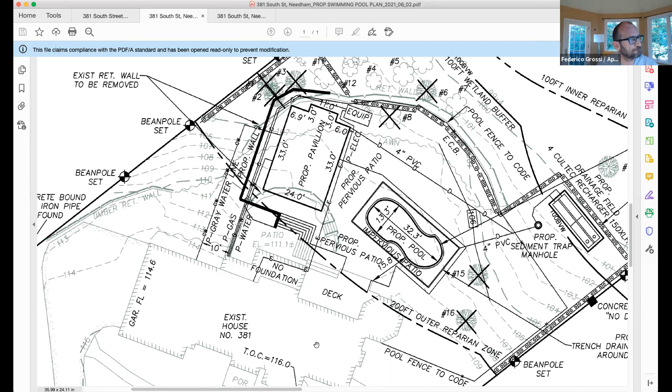So I can walk through. The wetland report was updated and submitted. Can you see my screen? Yes. Here's what the pavilion will be.

I was asked to add the utilities, so we added water, the gas line here, electric, and gray water, properly separated by 10 feet from the water line. I did talk to the inspector and a plumber. One question was whether the water line had to be 48 inches deep, and since the pool and the patio can be winterized, they said that's not necessary as long as we provide the right valves for winterization, and we can clear the line and blow air in the winter to winterize both the gray water line and the water line. So that's what we'll do with the inspector.

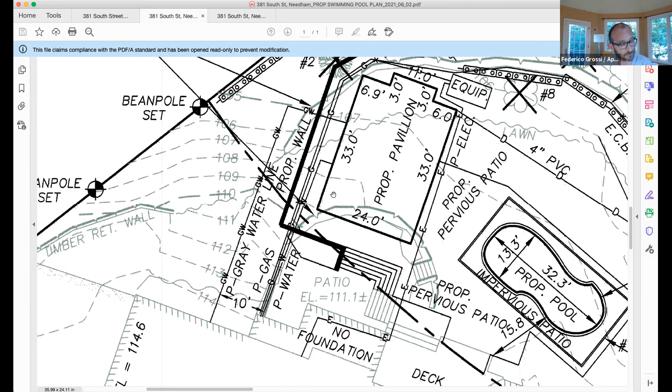So I did the test pit. We dug right here where the chambers will be, 48 inches deep—that's the depth of where the chambers will go. Found no water, and the absorption is about 5 inches per hour in that location.

So how did you dig this 4-foot deep hole? With a shovel? By hand? You dug a 4-foot deep hole by hand in your backyard by yourself? Yes. Wow, was it hard? No, not in that location. Did you hit any rocks? Not there, but I did hit some fill in the patio because it seems that on top of the retaining wall it was filled.

So in that spot I dug there will be 1 foot of gravel. I dug all the way to 1 foot and found gravel with fines in there. That one actually took a little longer for the water to percolate where the pervious patio will be. But here the percolation rate was really great, and the soil was very sandy. I have my Excel file with all the data.

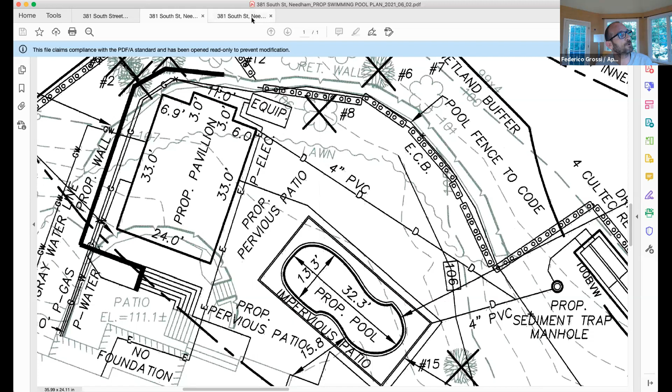So that was done. For the planting, what I was proposing before was to plant 12 Atlantic white cedars. The ask was to reduce to 6. I still made it 8 now—I'm happy to do 6, but I felt that in these 2 small locations, if we plant 2 to make sure at least one survives, it will be appropriate. So I marked the locations as I proposed.

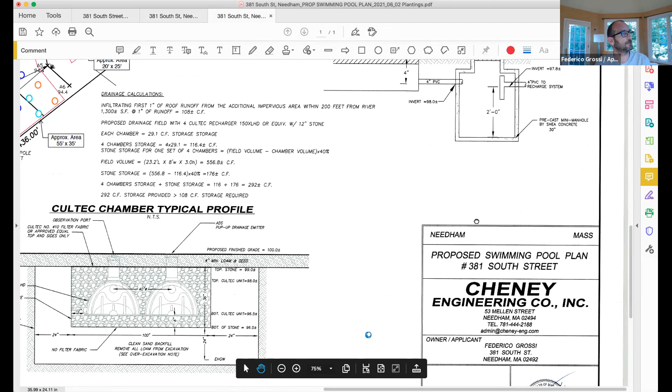There are major areas that are clean for planting, with no big trees around. We have a 10 by 20 area right across from flag B3, a 10 by 15 across from flag B7, and about a 20 by 25 area on the side of the house by the Alderbrook. I feel we can fit 4 here, 2 and 2 in these 2 areas of Atlantic white cedar. I'm happy to just do 1 and 1 here.

Did you find out about planting within the drain easement? No, I didn't look into that. Yeah, I don't think you can put those plants in the drain easement because they're going to be big trees, right? That's the idea, they're going to be really big trees. Yeah, but there's already a ton of big trees—these basically are the little spaces without big trees in the easement. Well, I understand that, but I don't think it would be appropriate for the Conservation Commission to give you permission to plant in the town's drainage easement when they may come and dig that whole thing up someday.

So we're not going to be able to let you plant those 4 trees in that location. Okay, I think then we should just move on, because actually the easement, I think, is on that spot.

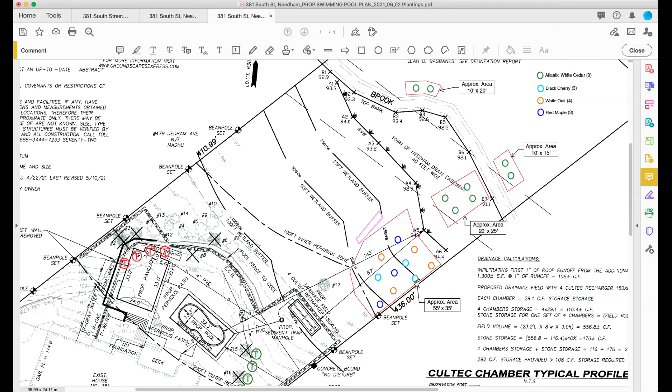Somebody needs to mute. Okay.

Okay, keep going. Yeah, and then the 4 transplants that we had here, where the pavilion will be located, where we remove 15 and 16 here that were on the list to be removed.

Were those like the dogwoods or something? Yes, so we have a double-file viburnum, an azalea, a Korean dogwood, and a rhododendron. So you're going to move all of those? And then you're going to, 1, 2, 3, 4, 5, totally, 6, 7. Oh, but they're all 200 feet.

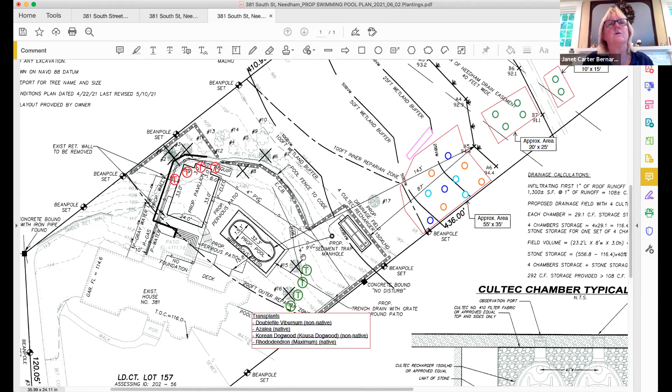So 7 trees are coming out, 4 are being transplanted. Yes, so 7 are coming out, 4 being transplanted, and - I thought 4 of them are being cut as snags? Yes. So they're not completely coming out, exactly - 1, 2, 3, and 6. We can leave the snags like those here. Oh, okay, so then 3 are fully coming out. Yes. Okay.

Okay, so your tree-to-plant ratio is appropriate, and maybe other commission members can weigh in. I know Allison was very interested in the white cedars, which need to be planted in the wetlands - something she thought was very beneficial. But there are also proposed plantings that are not white cedars within the 25-foot no-disturb zone, so other commission members may weigh in on that.

Right, okay, what else? So let's do the math again. Right now I was proposing, because I wanted more white cedars, 18 trees. So if we remove these 4, I still have 14 trees, which is the 2-to-1 ratio. So even removing these 4, we'll still be within the 2-to-1 ratio. Yes, so I wouldn't have to add any additional trees. You do not have to add in that - you have ample trees, I believe. Others can weigh in on that as well.

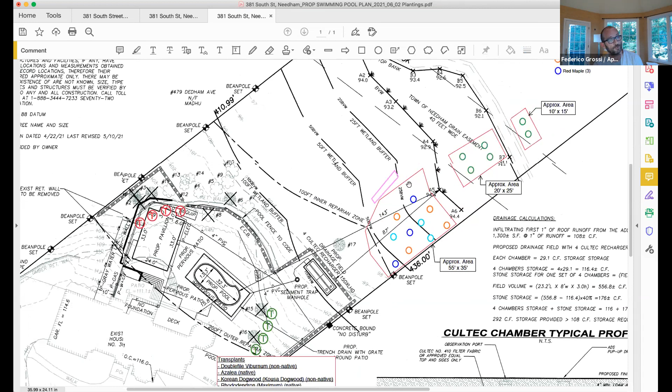Anything else? Yes, so I am requesting a waiver of the regulations for planting in the buffer zone, within the 25-foot buffer zone, and of course in the wetland itself for these 4. And then requesting a waiver of the fee since it's minimal work to be done - it does not require a lot of review by the commission.

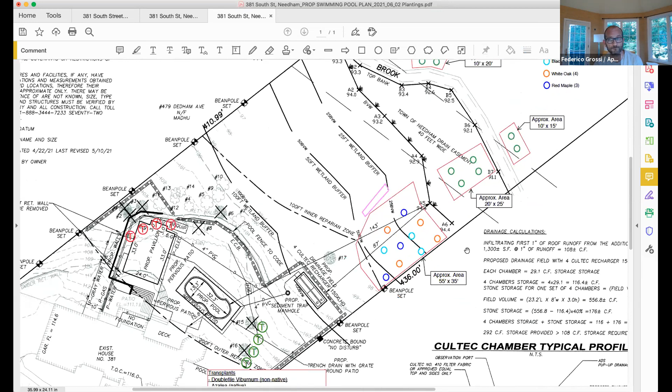Are you done with your presentation? No, so for the alternative analysis, we looked at the project and basically the only alternative location would be in the front yard, which is not common for such a structure. In the backyard, we did our best to reduce the impervious surface as much as possible, so there are no other alternatives on the property to build the project. Is that all written up in the information you gave us? Yes.

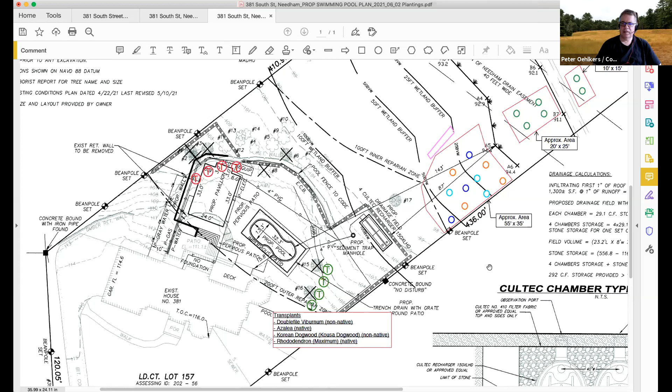Artie, do you have any comments? Not right now, I'll pass on to someone else. Steven, any comments? No comment. Sue, do you have any? I have, I'll put video on later, sorry. No comment. Peter is there somewhere, I think. I don't see him, but I think he's there. I'll speak up. Yep, I see you now. Do you have anything to add? No, nothing to add. Is that everybody? I think that's all of the commission members.

My one other question, and then I'm going to ask Deb and Clay if they have anything to add: have you spoken to the building department about your stormwater improvements and what the town regulation says? Have you talked to anybody about that? No. The town has a bylaw that says if you're increasing the impervious area of your existing house building by 25 to 50%, you also need to infiltrate.

along like half of your roof, like the side of the house where the increased impervious is going. Yes, but the impervious we're increasing is less than 25%. Oh, is it that the pavilion and proposed pool with the patio around it is less than 25% of your existing house? Yes, of the existing impervious.

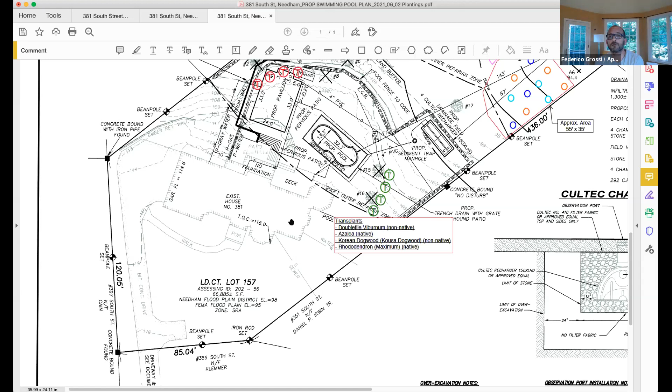That's what the engineer told me, and that's why. Okay, that's what my question was, I couldn't tell how much impervious you were increasing by. So, when you say the engineer, was that your engineer, Cheney Engineering? Yes. Cheney Engineering, who plotted that, Artie? Yes. Is it Artie you're working with? Okay. It'd be nice to see that written down.

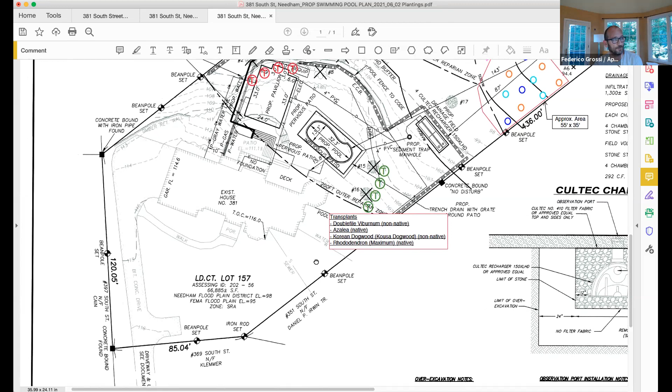Regardless of the regulation, I don't know if I should share this, but there is a bit of slope on this side of the house. So I'm planning, outside of the riverfront area, to put chambers in front to get some of the water off the roof, because I don't want that runoff. That's nothing to do with the commission, but that's something I'm planning for the future. No, but that's all good information we like to hear. That's a good thing.

Okay, I'm really just confirming that for your building permit, because they will stop you. So I want to make sure that's in writing for your percentage of building, so that it's been looked at and accepted.

Janet, can I add to that? Diane from Field Resources. Yes, you may. I think pools are exempt in that bylaw. Oh, all right, that helps. Thank you.

Couldn't remember that part. All right, so is there anybody else in the audience that has any comments for this project at 381 South Street? Clay, do you see anybody with hands raised? No raised hands? Nope. Clay or Deb, do you have anything to add or question on this?

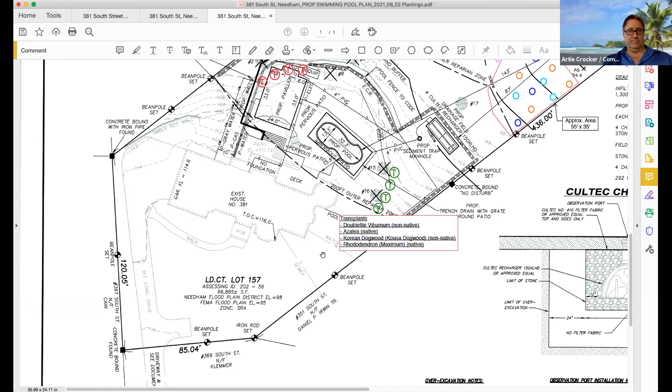I do, just about him doing his own test pits. I think that would be a precedent, I don't know if you want to go that way. Yeah, well, I was thinking about that, because we've had other people do that and then required them to have it officially done. I think in this case we could require the test pit be officially done at the time of construction, now that he has dug down and confirmed he didn't hit water. And if he did it in the last two weeks, it's been pretty wet. Okay, well, so condition a test pit to be done.

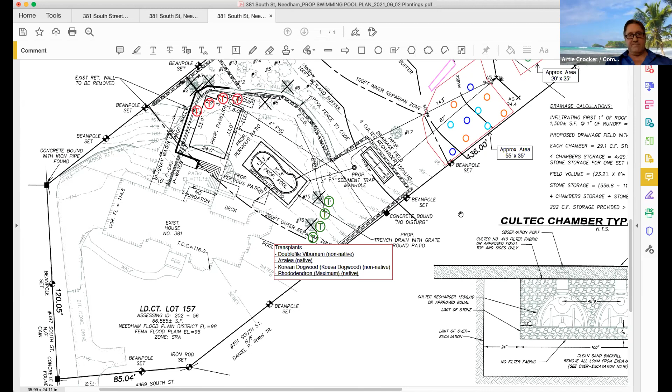At the time of construction. Yeah, I did it right after the three-day, four inches of rain that we got. Because I feel there's something to be said for it, since groundwater would be a concern, and if he dug a hole and didn't hit groundwater, that's significant. Do you have any pictures of that hole? I don't think I took any pictures.

You do an official soil test at the time of construction, and it will need to be done by a certified soil professional or engineer. They're kind of the same. Okay.

So that was my concern, was the amount of impervious cover. I did do the calculation and confirm that the size of the Cultec chamber is adequate for what they're proposing.

I know that Allison was very in favor of the white cedars, which I would struggle with. Does any commission member have any comments about allowing plantings within the 25-foot no-disturb zone, considering we're allowing him to plant basically in the wetland with these white cedars that Allison says are wonderful?

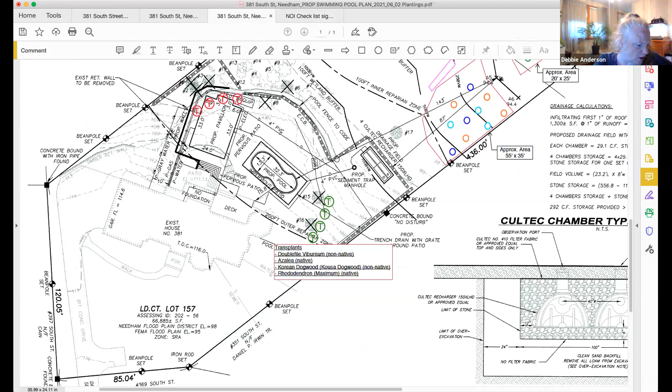Did we confirm that that's wetland on the other side of the stream where he's planting them? Sorry Deb, what was the question? The delineation shows the wetland on the inside of the brook. On the other side, where you're going to put the two areas of white cedars, is that confirmed to be wetland?

Not by the wetland expert. There's definitely wetland in there. You have the same vegetation, but that is not in the report because all she did was measure towards the house.

I don't know if we should run it again. This is definitely all, and actually all the way to very close to the street is marked as wetland in the town maps.

I just wanted to make sure they were going to survive there. Yes, so make sure that when you look at the vegetation on that side, it's as wet as on this side. So all this area is wetland, and I can try to pull it up. It's okay, I was just concerned for your trees, wanting them to do well, that's all. I think if you trust my opinion, they will be the same.

Actually, in the original map that Clay shared with me, that's the whole area shown as wetland. And now the wetland has come to this side as well. It's not shown in older maps on this side of the brook. It was all on the other side of the brook. Okay.

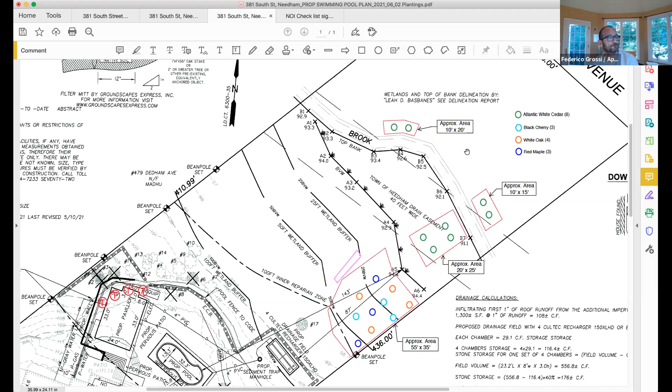All right, so does anybody in the commission have anything else to add? Artie? No, I agree with what was stated about the homeowner doing their own test pit, but what we can do to verify that as it's going on with what was said. So that's good.

Stephen? All set. Peter? Nothing to add. Sue? Sounds good. Do we have everything that we need? And are we ready to close this hearing?

The only thing I'm looking for is hard copies of the revised information. How many hard copies do you need? I need two. I'll pick them up on my way here, David. You'll have them in the morning. Okay, thanks.

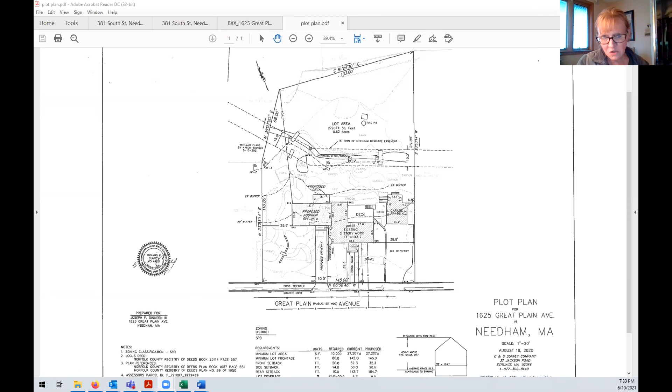The applicant put a small addition on the house, an in-law apartment, and a deck on the side of the existing dwelling with a driveway. The driveway is outside the 100-foot buffer. There's a stream that runs through a drainage ditch at the back of the property.

The property is very vegetated. Cindy has done a lot of work to create habitat for the creatures in the area. The proposed work is outside the 25-foot buffer. The deck kind of skirts the 25-foot line, but the footings will be dug 2 feet in, and the deck will cantilever 2 feet out towards the wetland.

That's going to be placed just at the line, so the footings will be outside. The ditch runs through the entire backyard.

The proposed addition is 753.13 square feet, with the deck off the rear at 120 square feet. As I said, the driveway will be outside the buffer zone.

The vegetation in the area of the addition is rhododendron, hydrangea, mostly pachysandra, and some ivy growing on the house. No trees are to be removed. The rhododendron and hydrangea will actually be relocated on the property.

For runoff, the applicant is proposing to put in rain barrels. Currently there are rain barrels on each corner of the house, used to water the vegetation in the yard.

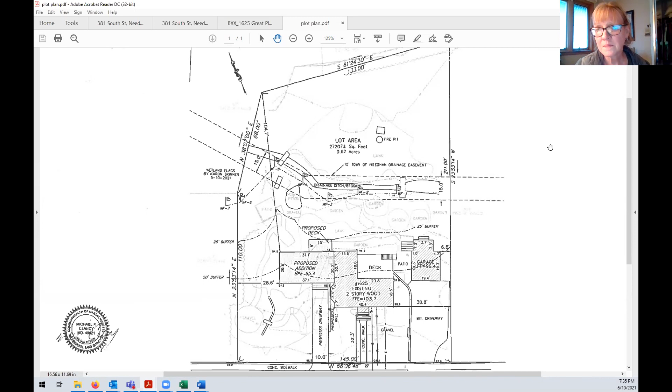When you say what happens in the winter, do you mean with the rain barrels, like do they freeze? What I do is I flip them upside down. Then on the downspouts I put in little diverters, if you will, so the water goes through the downspout and diverts out into the yard. I just add more gutter so it diverts out into the grass.

So you guys will have to let me know. I don't have any rain barrels currently in the back, but I can add them if you think it's a benefit for the project, or not add them if you don't. I like using them because I think they're good conservation of water, and I have lots of gardens.

Yeah, I've actually been on this property because you were part of the garden tour. Is that true? Yeah, a couple of times. And I know you have rain barrels next to your garage, because I actually took a photo of that one year.

I guess I personally am struggling a little bit, because I know you've done a lot of environmentally conscious work on this property, but we may need to require you to infiltrate some of that roof runoff — it is a town requirement now.

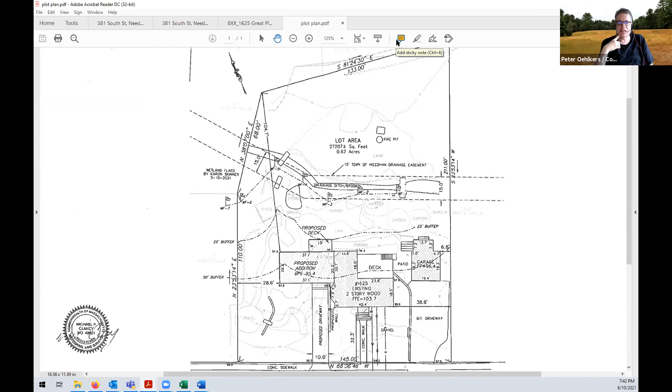The spirit is to keep it as native as possible and keep a close eye on invasives—that's the key, not letting stuff get in there. Well, the runoff from everybody's lawns behind us, it's a joke, but whatever. I don't use any chemicals, but everybody else does, then I have it floating through the yard.

Every time one of your neighbors comes to us, we try to tell them not to use chemicals on their yard. Oh my God, it's frustrating. It really is, but whatever it is. Thank you, no other questions. Thank you, Peter. Artie, do you have any comments?

No, I think it's going on well. It's clear that Miss Macgowan, Cindy, you take this very seriously—the health of the environment and everything going on, doing whatever's possible. So thank you.

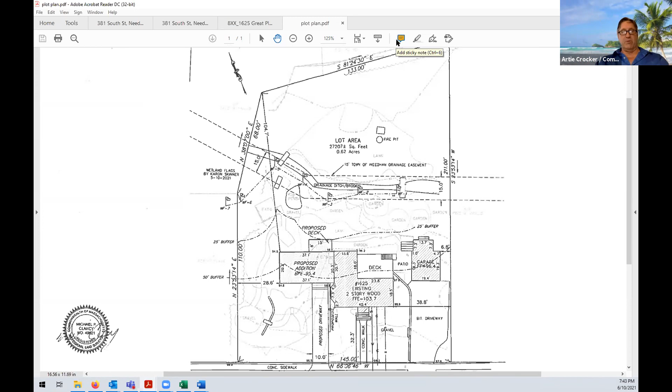Ryan, Sue? We're okay with the deck, even though 2 feet will go over the 25 foot, but the footing is before that line. The deck itself, the top of the deck will be 23 feet away, and the footings will be 25 feet away. Exactly, yes, that's exactly right.

Okay, no comment, sounds nice. Steven, you have anything to add? No comment. Do we have any photos of this property?

Yeah, sure. Do you want to go on Facebook? There's some pictures there. Deb or Clay, have you been out there? Did you guys take any photos? Yeah, I didn't download them though, because you guys never look at them. But I'll have them for the next gardens meeting. It's beautiful right now, you should come take pictures, or you could go on my Facebook page, there's tons of pictures.

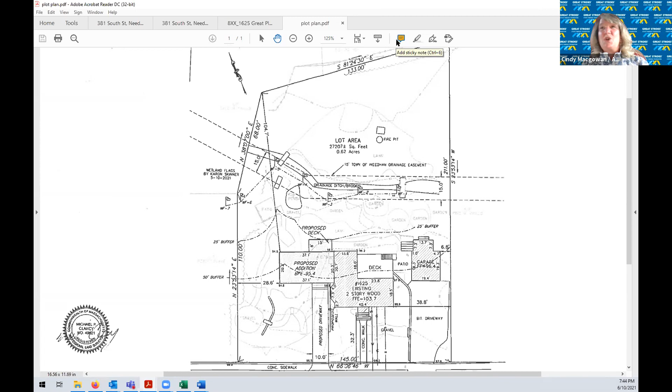Yeah, I think we want some photos of this area to show that this is basically native plantings and not lawn on this side, within the 25-foot no disturb zone. So I have pictures, but I didn't download them, but I'll have them ready for the next meeting. 'Cause we'll have lots of pictures for the next meeting.

Well, it is really a very pretty property. I was kind of shocked you were gonna put an addition on that, on that lawn. Well, I love my garden. My mother and I want her to come live with us, and she's so excited to be a Needham resident, she truly is. I moved her in from Connecticut on June 1st. All her belongings are in a pod. So we're really excited to get started, as you can imagine. But yeah, she's a wonderful woman and she'll be a great addition to our community.

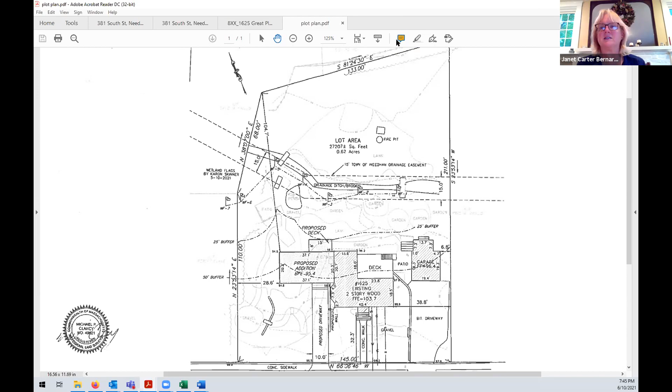Lovely. All right, so we will need to continue this hearing. Is anybody in the audience have any comments? There are no hands raised in the audience. And anybody else that I can see have any comments? If you want to raise your hand - and everybody's good.

Okay, so we need a motion to continue 1625 Great Plain Avenue till June 24th. That's my birthday, so you have to say yes on my birthday. You don't have to come if you don't want to, you can go out to dinner on your birthday. But we will be meeting, we believe we will be meeting in person, so check the website, or call, I don't know what to tell you.

That's exciting. Okay, so moved. So Artie said yes, so. Second. He said second, thank you very much. All in favor? Sue, aye. Peter, aye. Stephen, aye. Artie, aye. Janet, aye. Great, thank you very much. Have a good night, we'll see you in a couple of weeks.

All righty, next on the agenda is 3 Mary Chilton Road, request for determination of applicability. We expect to have Lisa and Tom Daly.

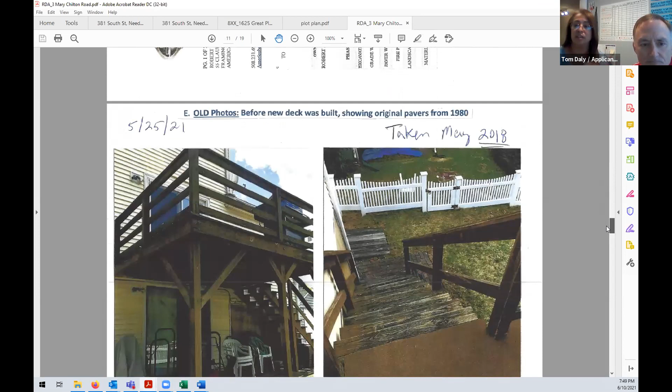We're not entering into the 25-foot buffer zone. The dots are the footings of the deck, and that's the line we can go up to with the footings, and we're not going to go past that with the pavers. The deck is cantilevered 2 feet past those posts, and that was approved. That's why you have the line going past those posts, but the posts are not entering the 25-foot buffer zone, and neither will the pavers.

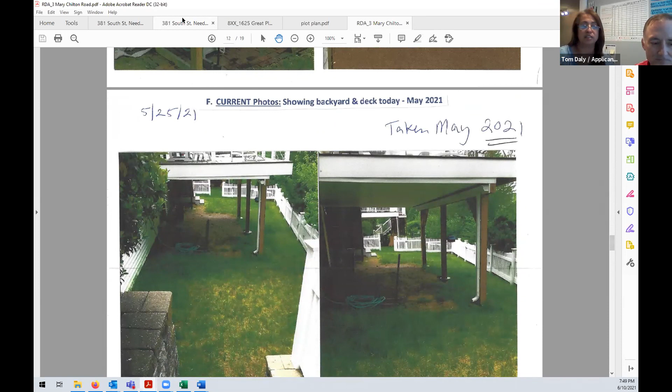So we would have pavers that are under the deck and then also coming out toward that stone. These are steps, stone wall and the steps. So basically, what is it, Robert? Like 25 feet from the steps to the actual first post, and then under the deck. It's not a big area, but we don't go down there ever.

You probably don't want to put sand underneath them because it's gonna be stone dust instead. Sand chip makes dust and ants come with the sand. Robert knows the best about that stuff. Yeah, it's gonna be paver chip stone.

Chip stone, and will there be some larger stone too? Yes. How many inches? I believe 3. So you're not counting it as really permeable, but it will act like the grass. Yes, it'll slowly leach through, yes.

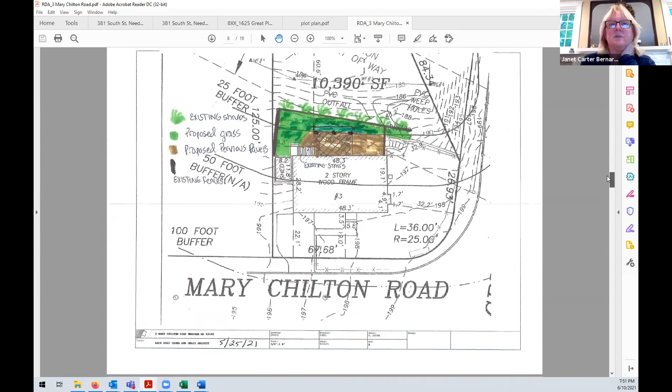Okay, so this is a determination of applicability. They are close to the 25 foot, but they are also within a fenced grass lawn area. Commission members were wondering if this is reasonable to be a determination of applicability and not file a notice of intent. So any opinions, comments, questions?

Stephen? Yeah, I think it's clearly in an existing disturbed area, and even though it is within the 25 foot, we've got a really solid delineation with the fence, and if the proper controls are put up outside the fence, I think it should be fine. I don't have an issue. Peter? No issues.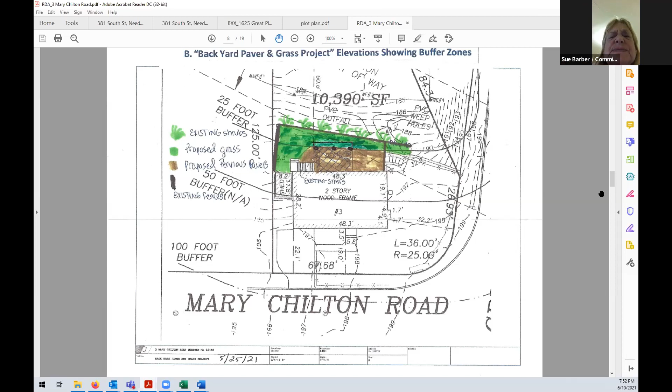Sue? I'm just wondering, the extent of the proposed grass, I'm trying to look at it. I see the fence and I see the 25-foot, and I see it is as is, with the fence that's been there, and the grass goes up to the fence. So what's being added with the lawn?

Well, just hoping it grows. Yeah, the grass, it's really sandy back there. It was almost like when they built the house, they pushed like a sand fill to the back. So the grass tends to die out quick. It drains very quickly.

And they're just looking to have a grass that'll stay green all year round. So how are you gonna make that happen? You're gonna use loam? We're gonna use sod. Oh wow. It's a small area, so it's very affordable. It will hopefully grow. That's good. Don't forget to water it.

Artie: I suppose my only question really comes into play is, permeable pavers, but to what degree are they permeable related to the existing grass, dirt, so forth that's there? Janet: It's comparable to what he represented it being. It's not considered an infiltration practice, but it's comparable to grass. Well, for example, there's still pavers. Was it like, perhaps from an educational aspect, 50% relative to if it was just straight grass?

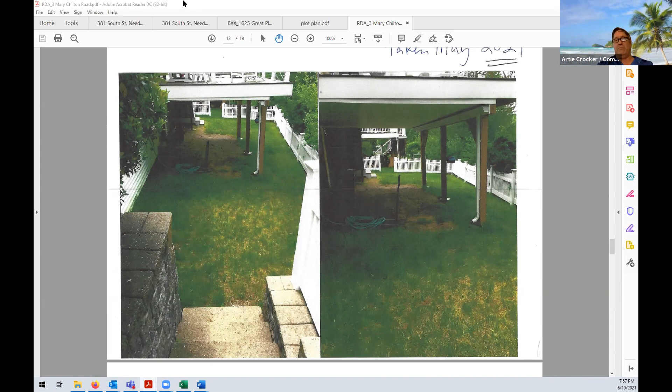I'm done. So I think maybe Deb or Clay, if we issue a negative determination of applicability, can we add a condition that there'll be no fertilizers, pesticides, herbicides? Yeah, we can. Okay, so that is easily what will happen. So you are not surprised with that? So that would be our primary concern, is that you're not adding any pesticides to the wetland.

That's fine. We don't put that on the front lawn either, and we have a lawn with a sprinkler system in the front. We take care of it, but we don't put chemicals on it. We're not about chemicals, really. Great.

Deb or Clay, do you have anything else to add? So I met out with the applicants on the site when they were considering this project, and the discussion came up about NOI versus RDA. That's part of the reason why they pulled the patio to the 25-foot, because there wasn't a mechanism to issue that waiver. I did want to point out this house had received a filing - I think it was back in 2013 when they redid the retaining wall here, and with that, this deck was also constructed.

This is primarily that dirt area that was mentioned. There's not very thick grass growing in here, and part of the reason for that is that the deck up above is actually impervious up until the cantilevered part, and then it catches in a downspout. That was reviewed back in that 2013 permit. So this isn't new or unpermitted, but part of where they're putting in this patio is already not capturing that rainwater, except for the fact that the downspout comes out and drains.

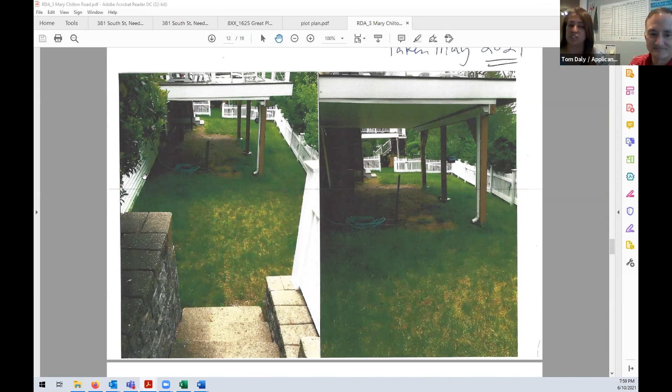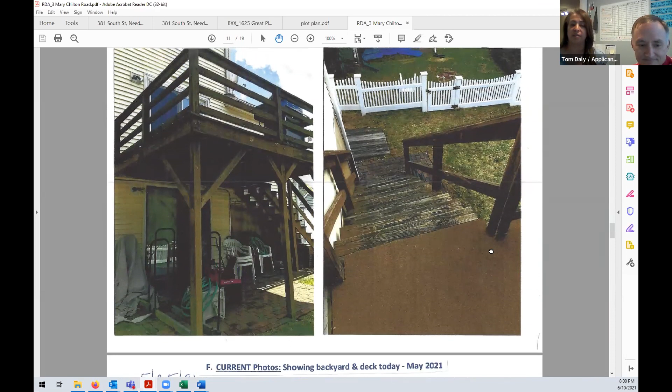Yeah, and there were pavers underneath the original deck, I would say. We had pavers under there when the deck was created. Of course, they were moved to put the footings in. So from the original pictures, you can see there were pavers under it, it just didn't come out from under it. That's the original deck in all its glory. Yeah, I remember this actually. It's hard for us to forget, but we're trying.

Oh, were you the original owners? Were you here? No, we're not the original ones, but I think we're one step removed from the original, right? Yeah, I think so. So I still know her.

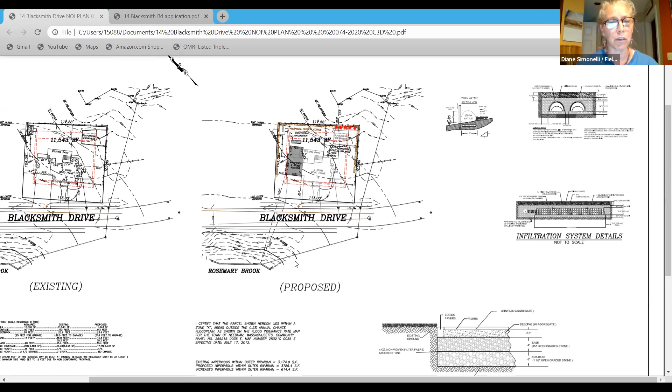The proposed addition, I believe, near the armored bank - the current disturbance is 80.5 feet away. The proposed is slightly closer. But wait, what dimension are you trying to get to? The 124.6 is from Rosemary Brook to the proposed two-story addition.

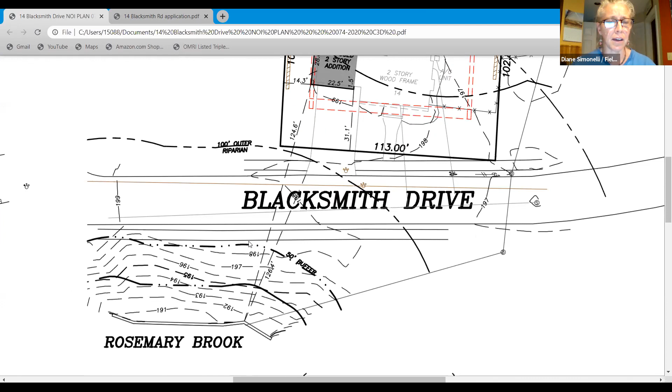Now it's coming. 124.6, yes. Okay, and again, the proposed addition is back there. There we go, I don't know why it was frozen on me.

Again, the locus property is separated by Rosemary Brook from Blacksmith, and then there's a slope down to the armored bank. In the pictures in the application, it's basically lawn down to the armored bank with a few trees with very little habitat, so there's not much to protect on that end.

The existing conditions for stormwater coming off the driveway will continue to stay the same, and it will run into Blacksmith Drive and into the catch basins for that portion of the property. In the back, where we've proposed an infiltration system, it's enough to satisfy the town bylaw for stormwater. In addition, we also have erosion control around the backside. In the front, we left it open due to access to the property for the project and for the homeowners to access the house.

Additionally, in the back portion, the homeowners have proposed a little lap pool, which is 7 by 13, and the patio is going to be 10 by 13. That's going to be between the existing house and the existing playground, which buffers us from the wetland. We've proposed a few shrubs in the back.

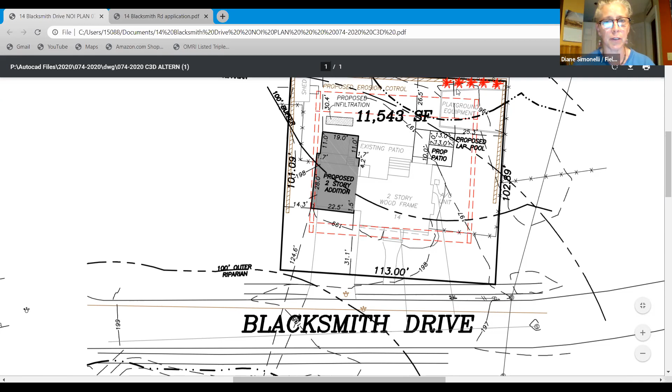Just for mitigation - are any trees being removed? There's no trees being removed. I can show some pictures of the project.

The locus property currently is completely lawn and driveway - let me just get to the picture. Here's basically across the street, as you can see, the armored bank to Rosemary Brook. Again, all lawn, a few trees.

But the single family home - let me just go back up a little further. This is the single family home, which is all lawn. And the lap pool would be right in this area where there's no vegetation besides lawn.

Any more photos in there? Let me see, I think I have some of the rear of the property. Let me go in the back, a little bit further. This is the alternative analysis, which was a larger pool - felt as though it was too overwhelming on the lot. I guess I don't have any other pictures.

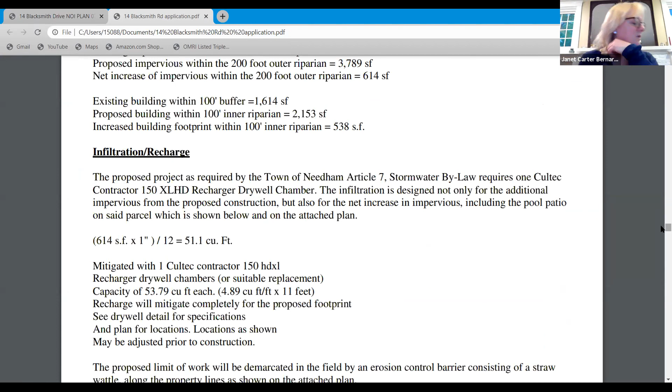On your plan view, what are the double red lines? Let me see - the double red lines are the setbacks. How come they're double? Setbacks from what? Because there are varying setbacks depending on what you do.

The front setback is 20 or 25 - the garage has to be at 25, the living quarters can be at 20. And the sideline has a 2-foot jog: you can only have 32 linear feet, then you have to jog in 2 feet. As the building department says, you don't have the wall of China staring into your neighbor's yard. So they like it broken up. All right, well, that's nice.

Okay, so no trees, but you're planting 5 blueberry bushes. You are within the 200-foot riverfront area across the street, and you are outside of the 50-foot buffer zone with all of the proposed work.

Any grading happening? No, as you can see, the lot is pretty flat currently, so the pool impact is minimal - you probably wouldn't even see it on the topography. If you look at the lot, there's basically a 2-foot grade change between left and right across the whole lot, so it's going to be minimal.

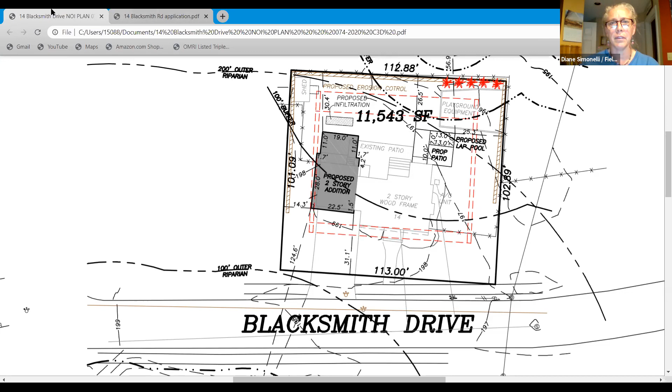Okay, commission members, any comment? Artie? It seems fairly straightforward. It's in between 150, no trees coming down, existing lawn, there's infiltration going on, lap pools in front of the playground.

Erosion controls are going up. Is any of that need to be considered for infiltration as far as volume goes? Turns out pools are exempt. I honestly don't know exactly why they're exempt, but I can partially understand.

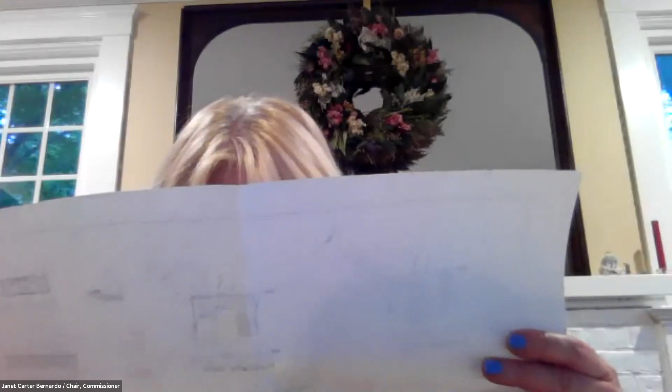What type of erosion control are you proposing? That is the wattle. Oh, there it is, on the fence side. It seems pretty straightforward - just got to do the erosion control, the infiltration, and we're good to go, I'd say.

And your patio is a pervious walkway with 12 inches of stuff underneath it. Correct. Did I miss something as far as the patio being added versus the existing patio?

Yeah, around the pool. Do you want me to bring that up again? Could you? Little patio that's going to be added in front, between the house and the lap pool, right in here. 10 by 13, okay.

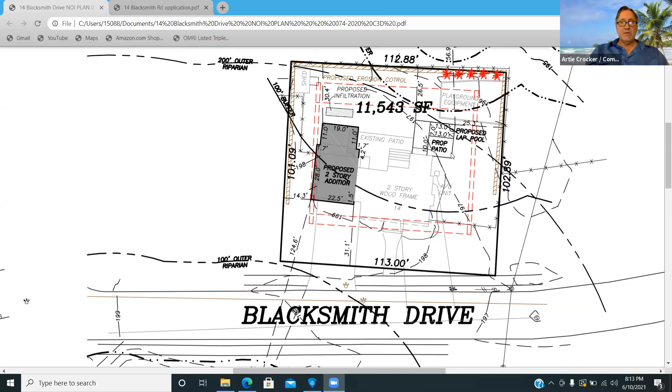The little 10 by 13 is permeable pavers, you said? And what's between the existing patio and the proposed patio? Yeah, those are just the setbacks, just going to be lines. Is that going to be grass? Right. Yes, yes.

Okay, next, did Angela have comments? Paula, Peter, you have any comments? No additional comments. Sue, you have any comments? No, I can't find anything. And Stephen? No comment.

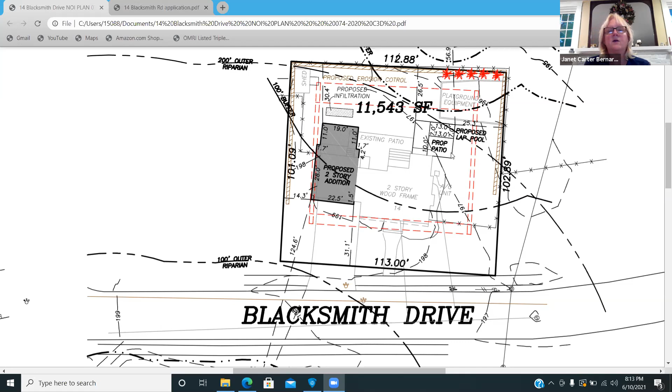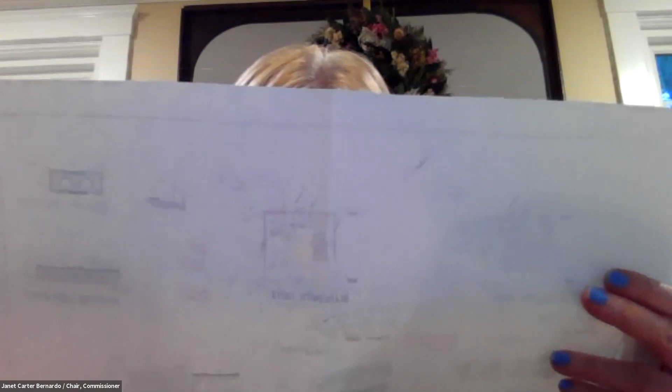So I'm struggling, what's the elevation? What was the elevation change? The height, the grass is 197, and one wetland is at 191 and the other is at 191. So they're both at 191 and the lawn is 6 feet above it. And what we propose is the Cultecs, which are very shallow.

And we will do that prior to construction when the machines come in. We're trying so hard to avoid this, but we can even do it prior to the order being released. Is that good? We're good with that, Janet? That would make me feel better.

Oh okay, the Dailies have a comment? Yes, if I could just speak to the ground conditions - this area has about 2 feet of loam before it hits sand, and that literally spreads all the way across from their yard into my yard.

I'm a neighbor - I'm their high-powered attorney that they asked to sit in. I didn't know what I was doing. I've got a lot to say, as you can see.

So I think we appreciate the comments. I think it has to do with precedent, as far as - we can say everything we want to say, but if there's some way to keep consistent in what we're doing, where it stays consistent but no harm will befall us, that type of thing. And so it sounds like there's a way to stay on that.

If we could have the test pit conducted prior to actually handing you the order of conditions, that would be desirable. Angela, I think that will not be a problem, correct? Yeah.

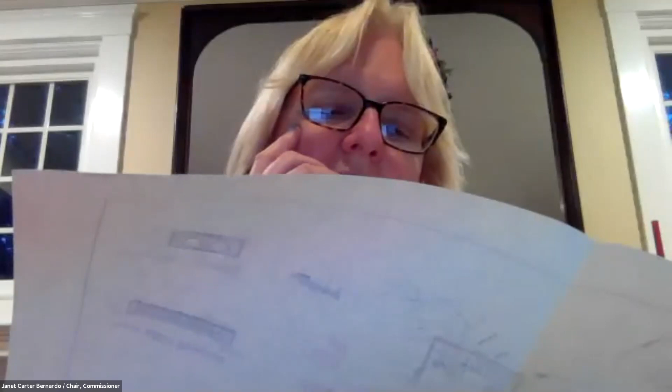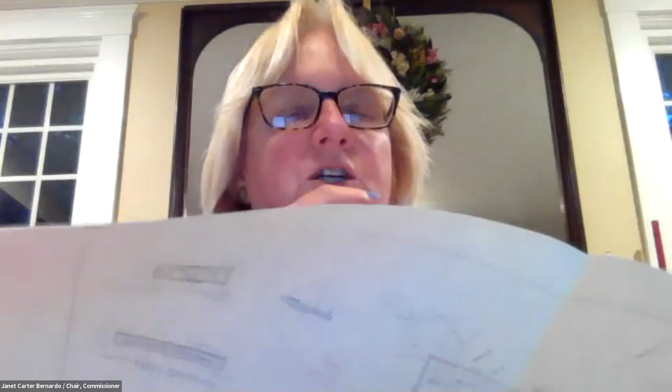I thought you said like a buffer for visual - she's gonna plant blueberries for a visual buffer. That's what I heard. Well, I don't know, because they're not taking down any trees. We didn't ask them to plant these. It's great that they're planting them, but do we need to have the monitoring? So that's the question at the moment - do we need to require the monitoring of these 5 high bush blueberries that they're planting because they want to?

Well, do we like them? I mean, I'm all in favor of the plantings, but do we need to monitor them? Anybody have an opinion? No. Stephen's shaking his head, said no. Anybody feel we need to monitor these blueberry bushes? Where's Sue? I said no. Oh, there you are.

Yeah, I had the same reaction as Janet, in the sense it sounded like they were just planting them. And I understand the mitigation, but I mean, if 3 of them died, would we hold up issuing a COC? I don't know. Right, that's a good point. I don't think we would. So we don't need to monitor them. I'll get rid of that.

And I did put the same thing in about the winterization and the signage, even though it's only 91 square feet. Yeah, but it's the lot - same chemicals. Yeah, definitely, okay, so that's in there.